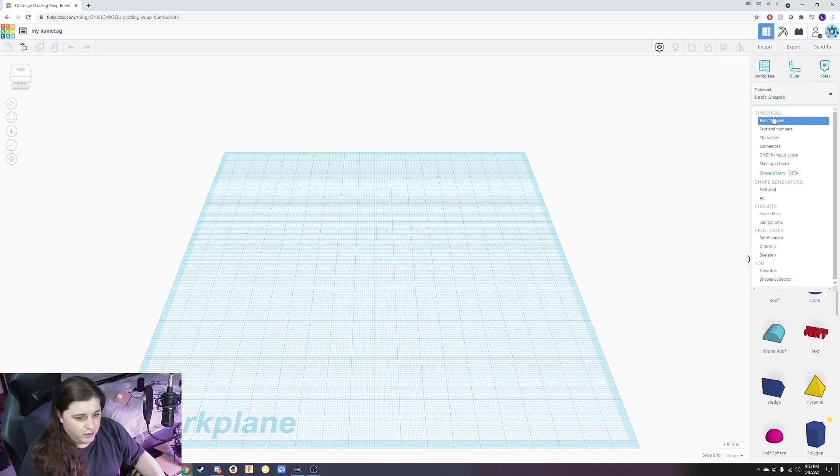Next, we want to get a shape onto the platform. So we're going to go down to basic, to the right side. It's already on basic shapes. If it isn't, left click on basic shapes and just go down to it and click on that, and you'll be brought up to it.

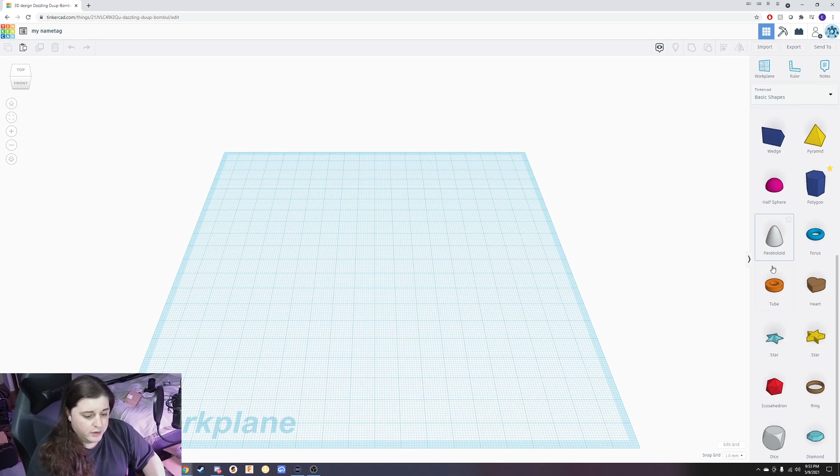Now we're going to make the basic shape of the name tag. We want to get kind of a square-like figure, but we don't want to use the box because of the pointed edges. So we're going to scroll down until we see the dice, left click and drag it out onto the work plane that they have here.

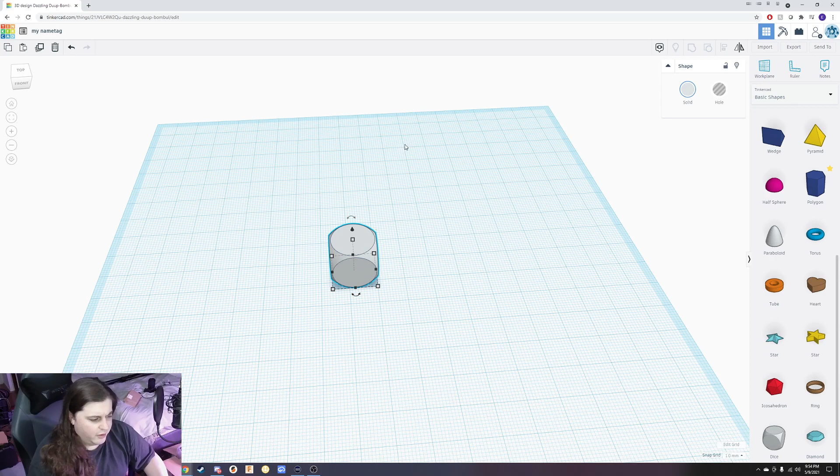Now the reason I chose this is because you can see all the sides are rounded. This means that it's not going to damage our clothes when we wear it. It's not going to poke you, not going to poke your shirt, not going to damage your shirt, hopefully. And everything's going to have a nice beveled edge around it.

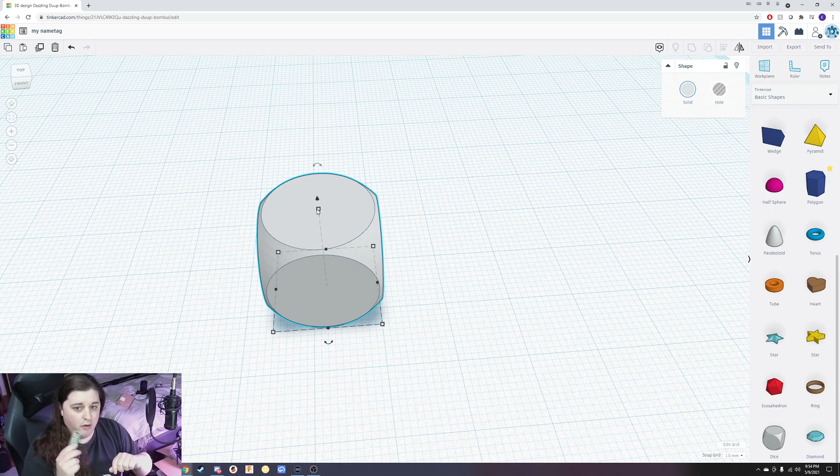Let me get out my calipers. And it's about 1.75, my original name tag. I kind of want to model the one I'm making now on screen off of my original name tag, so it's not too much difference. So, 1.75, but because 3D printing materials don't do well...

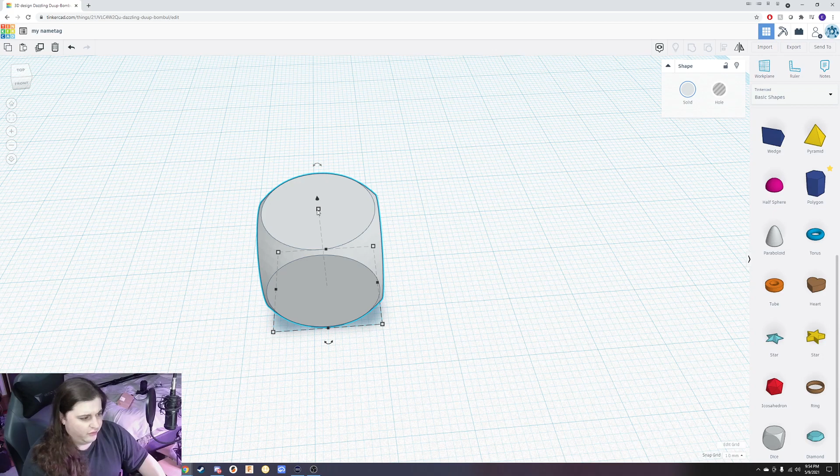It needs a certain thickness. It's not molded plastic, so I want to just make the height of this. We're gonna make this 6, actually. Now there's a point to that. 6 millimeters is a bit thick, but...

The reason I'm doing 6 is, first 3 millimeters for this plate, and then for the top plate, we're gonna add magnets on the back of ours because I like this one, it has a magnet design. This one's a steel plate, magnetic, not aluminum. Aluminum isn't magnetic, but steel plate on the back of this attracts the magnets, so you don't have to pin it to yourself. Pinning it ruins clothes, ruins everything.

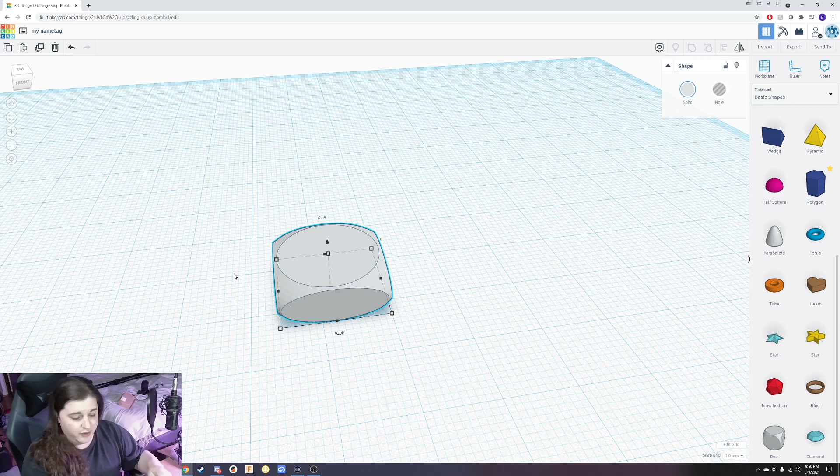So I want to keep my clothes from being damaged. So the first half of this is going to be 3 millimeters for the magnet, and then the other three is going to be for the design of the name tag.

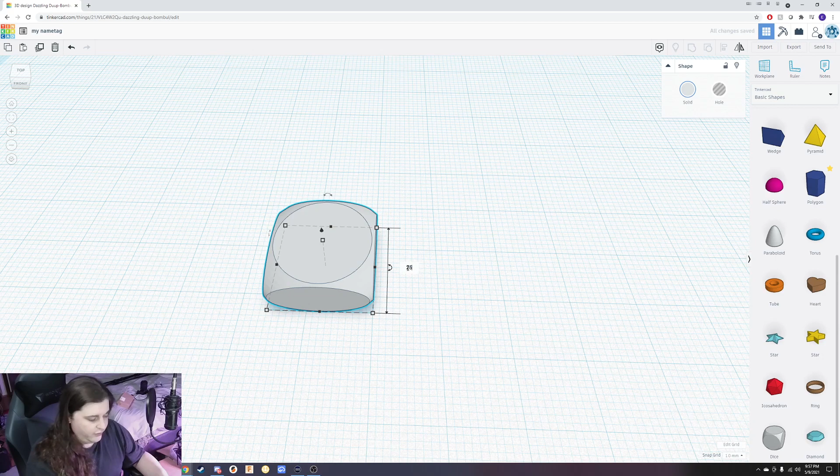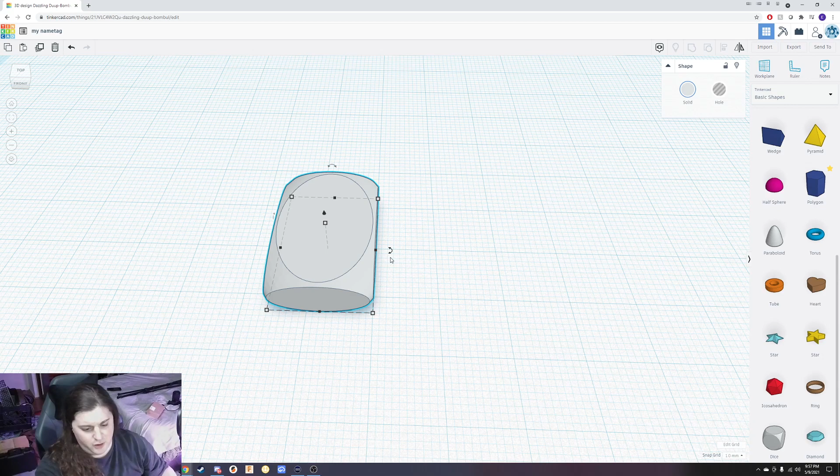All right, so now that we got 6 there, let's go for the X and Y axis. So one side of this is 25.5, okay, so that's the Y. 25.5. And then the X axis, the whole thing being measured out, like right there, that is 88.19. We're just gonna say it's 88.

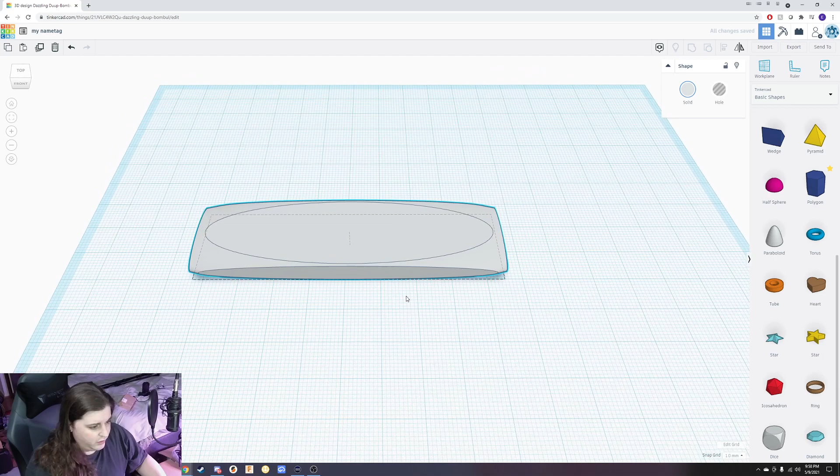All right, there we go, there's half of our project. Next, we're gonna grab some text. It's in the basic shapes, you just scroll up until you see text on there. Left click and drag it out onto the field. We're gonna put my name there.

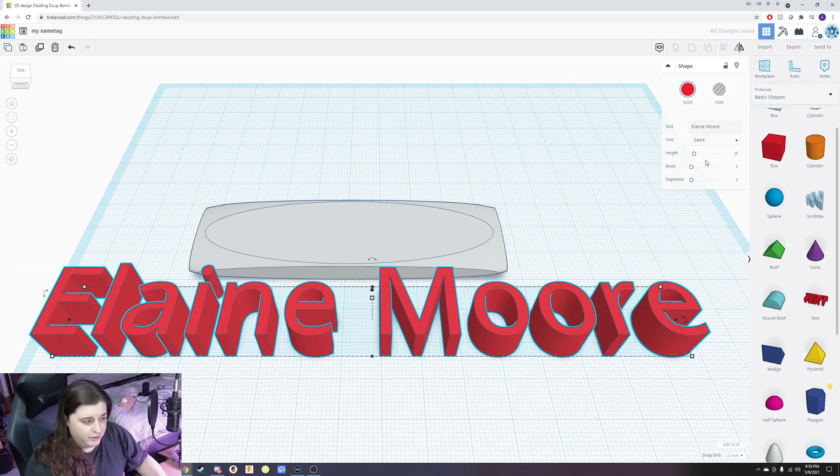And you know what, I'm also gonna change the font. So the font is, everything's being done on this right hand side under shape. You put the text you want, then you can go to the font right below it and change that. Let's go for Sans, I like Sans a little bit better than what it was.

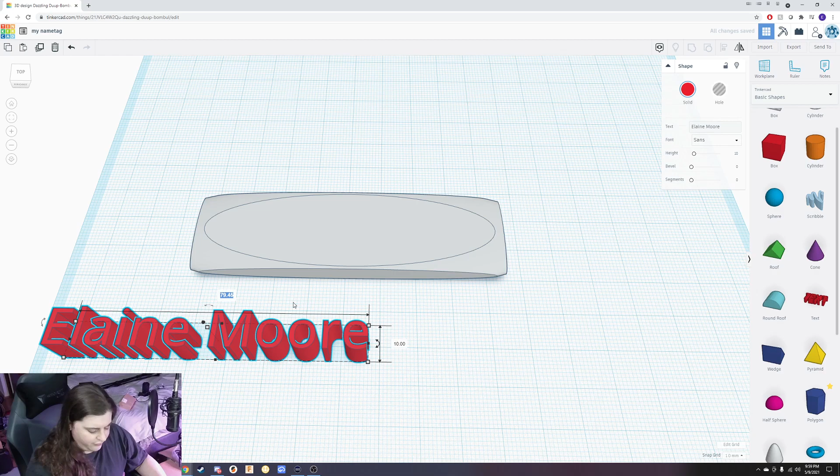And since it was 25, I want to make this a height of 10. And since it was 88, let's try for 70? I don't know, we're ballparking this right now.

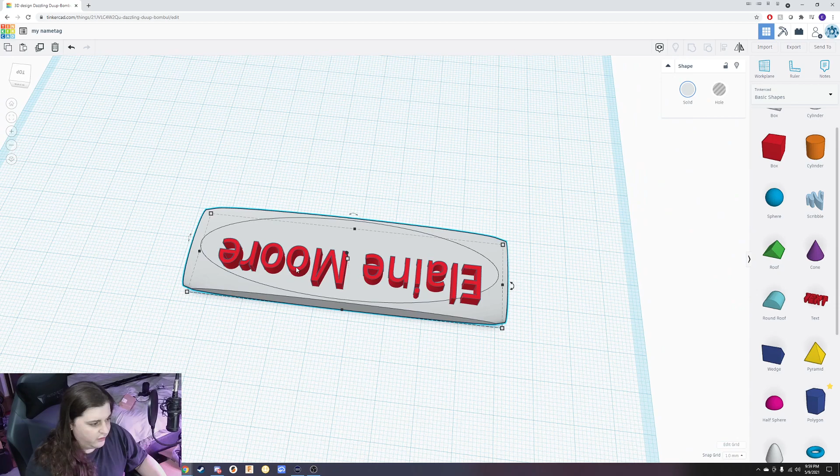I kind of want a spot where it's within the circle. I want everything to remain in the circle of the die up here. So let's bring this in a bit more. Left click, and I'm gonna select everything. Go up to align, and we're gonna just align it right in the center.

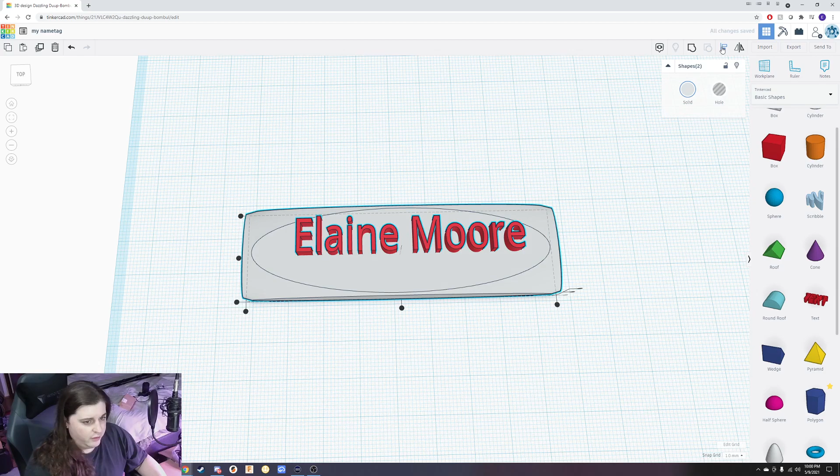Nope, needs a bit more shrinkage. Let's go for 62. Let's go try and align that again. And it's basically whatever you feel is right for you on this. You know what? I'm okay with this right there. Alright.

Next, I'm going to drag another text bar out. Left click, drag, and I'm going to put my title there. And we're also going to change that to Sans. And we're going to make this, again, 10. And we're going to make this 62 like the other one. Alright.

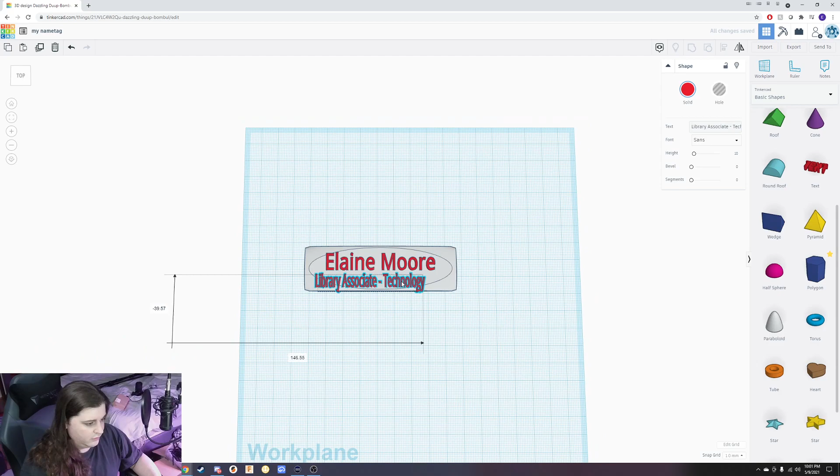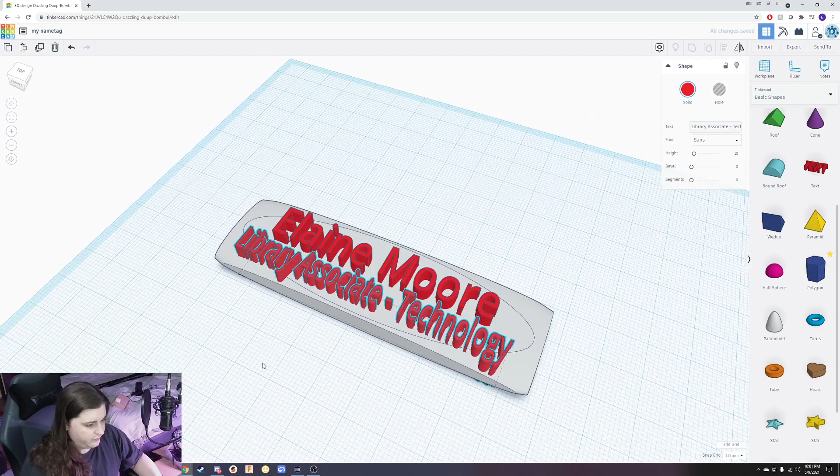And I don't care if this one overlaps a little bit. I actually kind of want to spread it out a bit more. Now, the problem with this is, actually, you know what? I do want to spread my name out more.

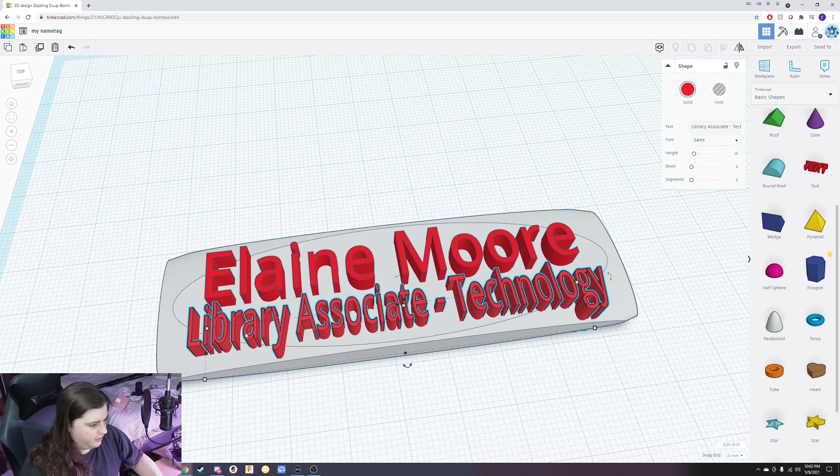I'm going to select all 3 of them and just align them to the center. And you know what? I want to make library associate technology, I want to make my position a bit bigger. We're gonna center that again. Everything's gonna be centered. All right.

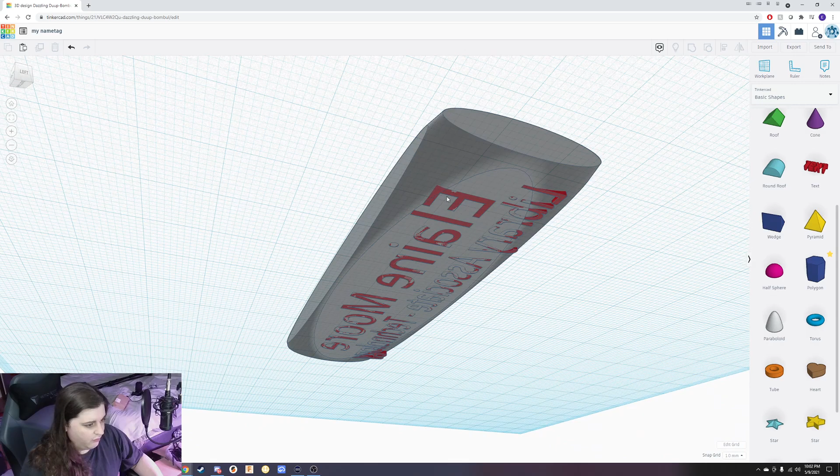Next, I gotta deal with overhang, because these are rounded. The words lie flat on the workspace right now, and the curved part going up doesn't. So you see all these, like, the letters getting right past them. Yeah, I don't want those there.

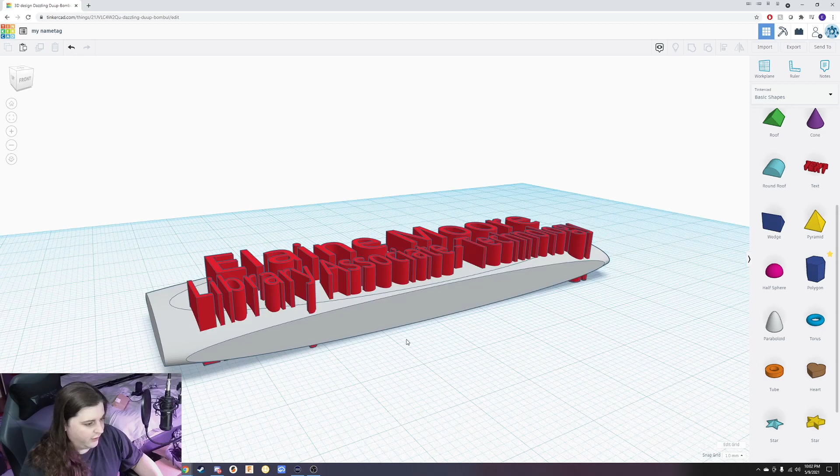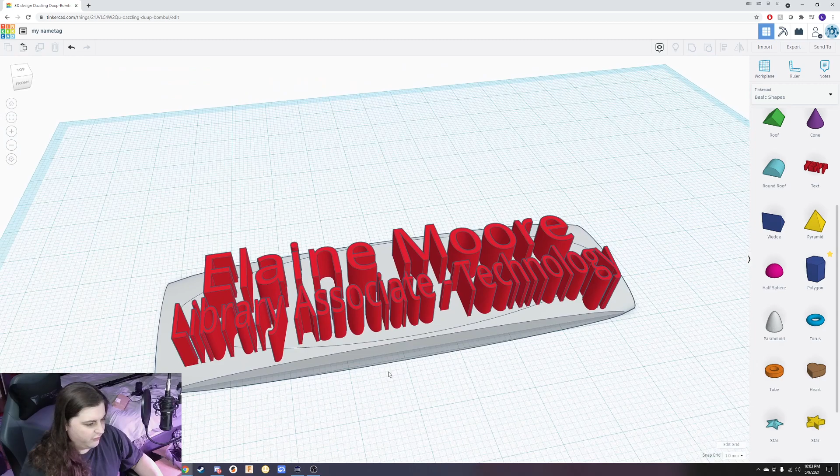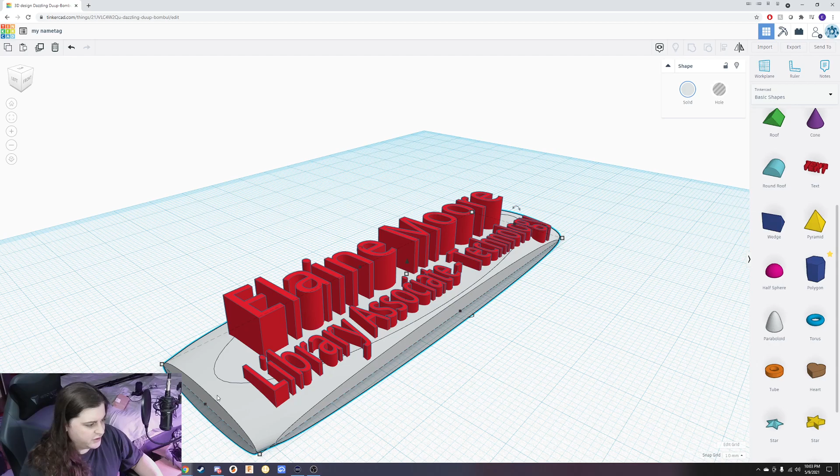Yep, okay, so yep. We want these at least maybe two off the plate, because this one—okay, so we moved the main piece halfway down, which is 3 millimeters. So we want to add an extra 2 to the words, so it's 5.

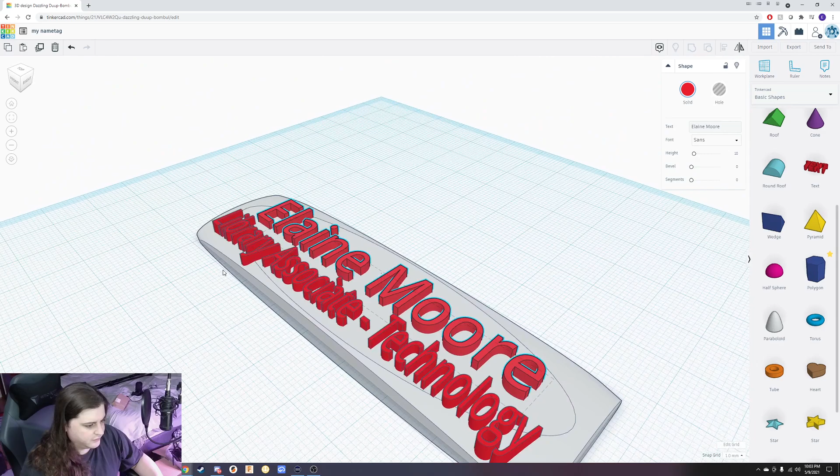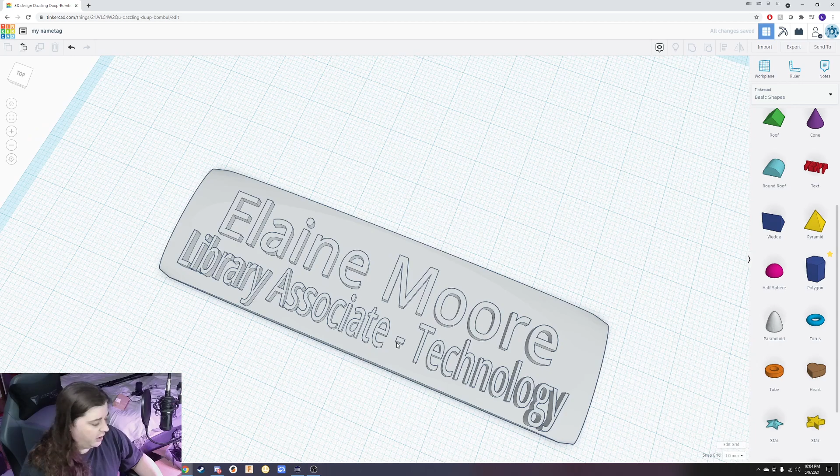I mean, it doesn't matter what you do with it. If you wanted to stick out a bit more, you can, that's fine. Heck, right now, if you wanted to, instead of combining them as is, you can do two options right now. You can either combine them as is, and it would be a stick out kind of name tag, so the letters would be pointing out of it.

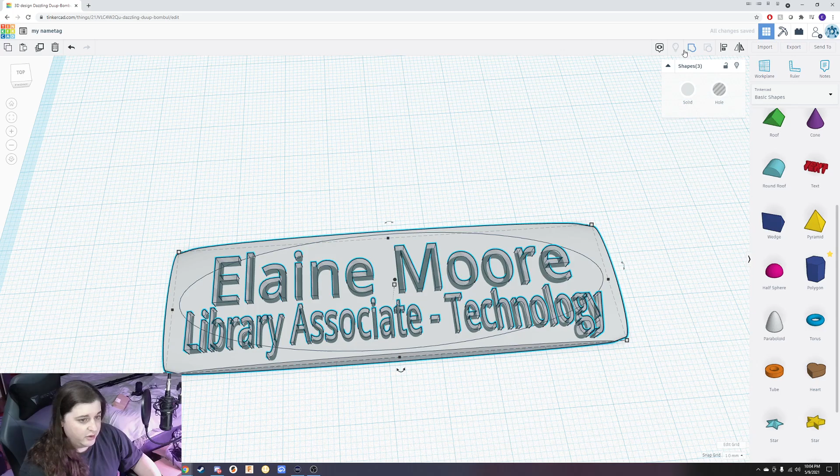Or if you wanted to at this time, you can turn the text. You would have to select both of them one at a time, and on the right hand side is where it says solid. You'd click hole instead, and then you do the same thing with technology. You'd click on that and press hole, and then you'd combine them, and this would cut into the name tag instead of having it on the outside.

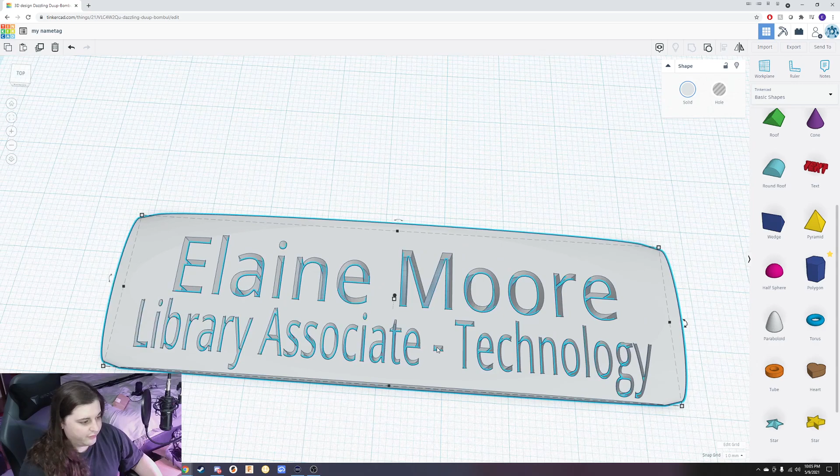So let's do this one this way, because I'm too lazy to actually change it back. But if you wanted to do it this way, you can also print it in 2 different colors.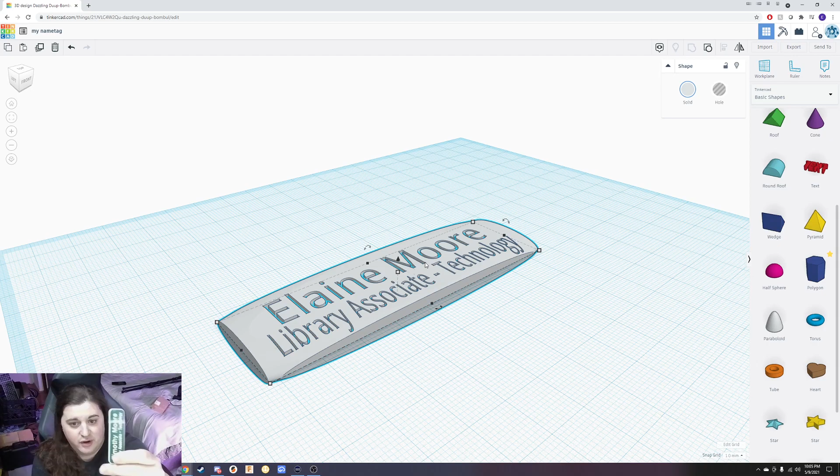So you'd have the layer, half of it you could print, the bottom half, in like white or something, and then you'd put a dark color for the top, so it would stick out like this name tag. It would kind of emulate this kind of texture. So it would do the white.

That's basically what they did here. They did it in white, had a white background, and then on top of that, they did a green. So that'd be fine.

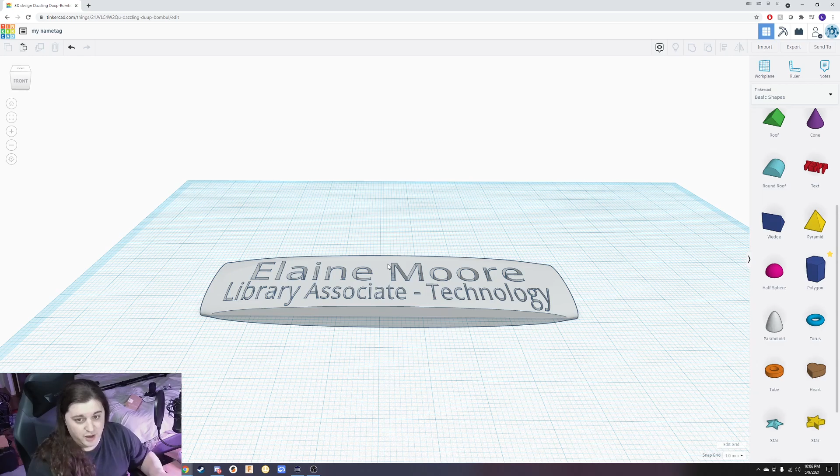This is actually the easiest way to get dual color, because if you did it with this stick up kind of thing and you wanted 2 colors for the name, if you wanted the name to be a different color, you'd have to catch it a lot closer to the end, and you might forget about it.

That's the thing when you change colors on your 3D printer, if you wanted to do 2 different things. So I'm gonna—oh wait, no, I'm not gonna do anything with that. Okay, so now that we got that, we have to deal with the back side.

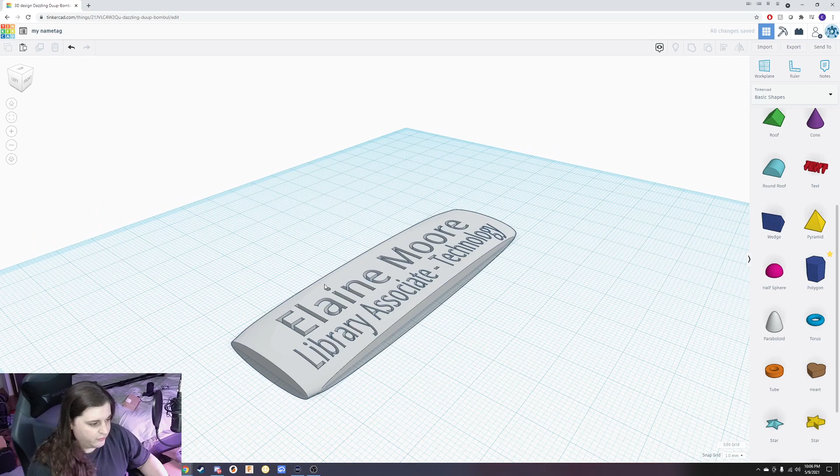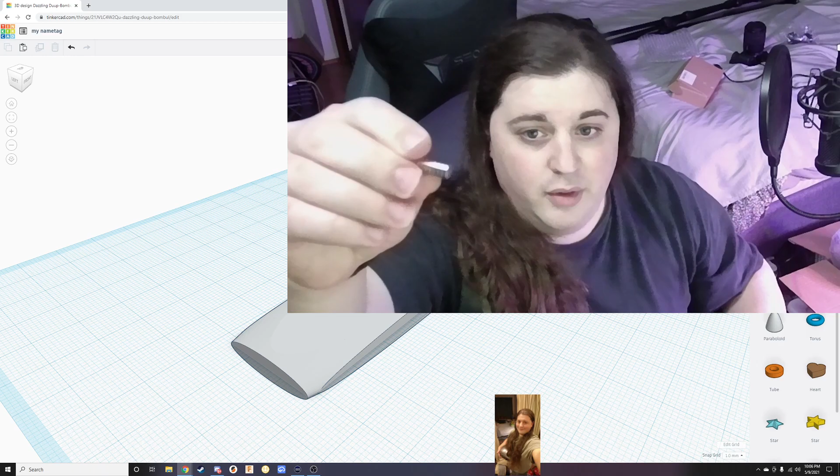Now I got these cool little magnets. Let's grab this. So I got these cool little magnets, Harbor Freight. They're the standard, like, miniaturized button size. They're 8 millimeters circle diameter.

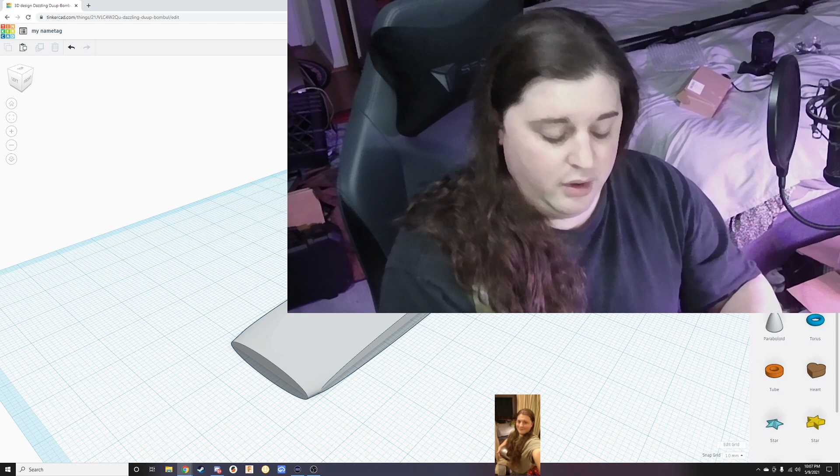And so, yeah, here's a stack of them. You get these really cheap, $2, $3, something like that. Actually, I didn't even think I paid—no, it's less than $3 for this. But, like I said before, this is what we're going to use to attach everything. So we need to drill in some holes to put the magnets into. Let's start with that.

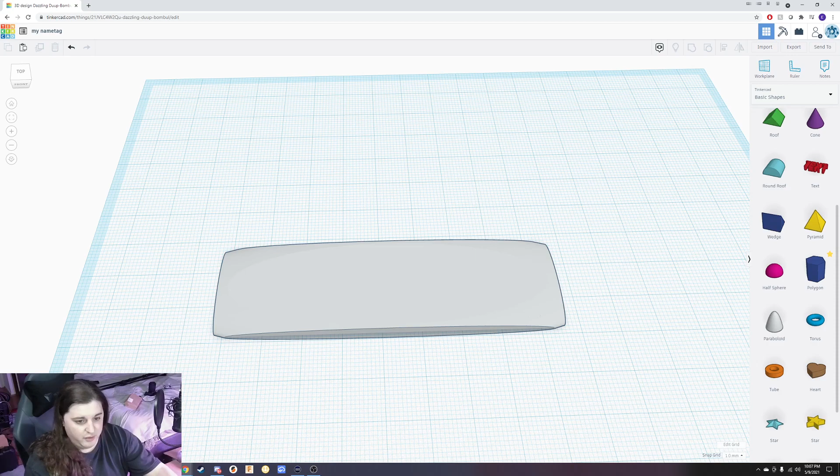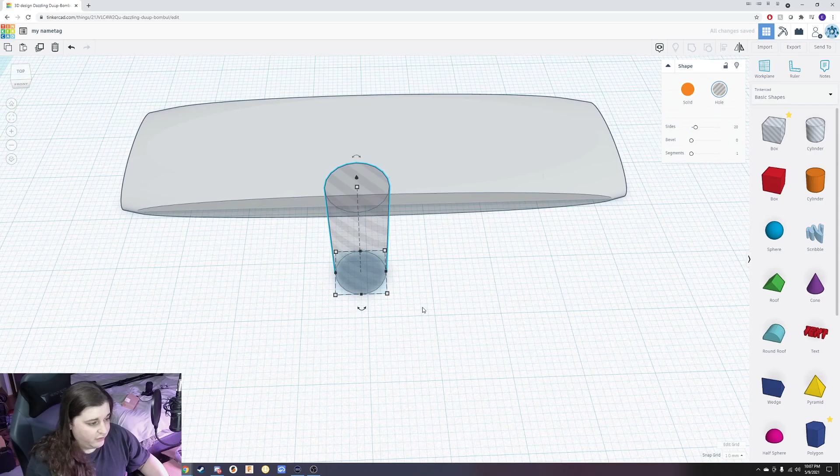So if I scroll all the way up, on the top right hand side is a cylinder. So we can grab that and pull it out. Now we want to change this to 8 and 8. So that way it's there. I already flipped around the name tag. You can do that by clicking on these half circles or semicircles with arrows on it.

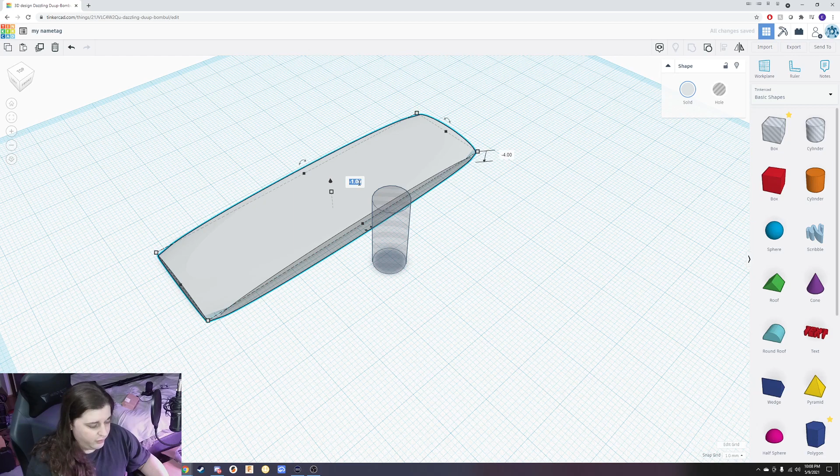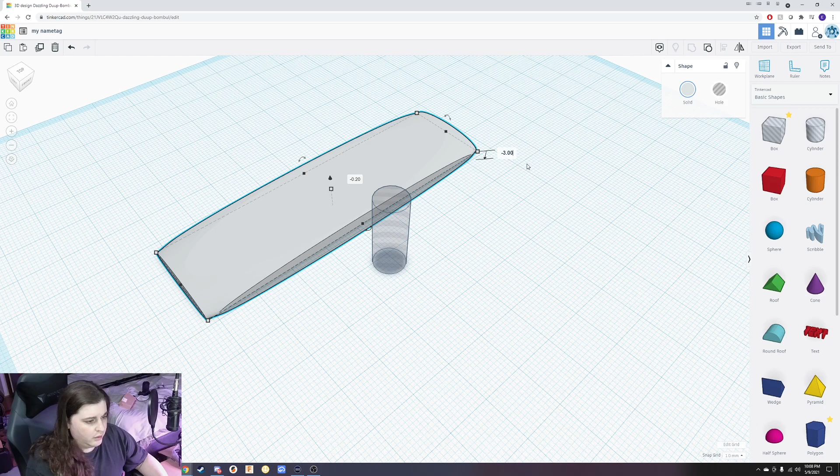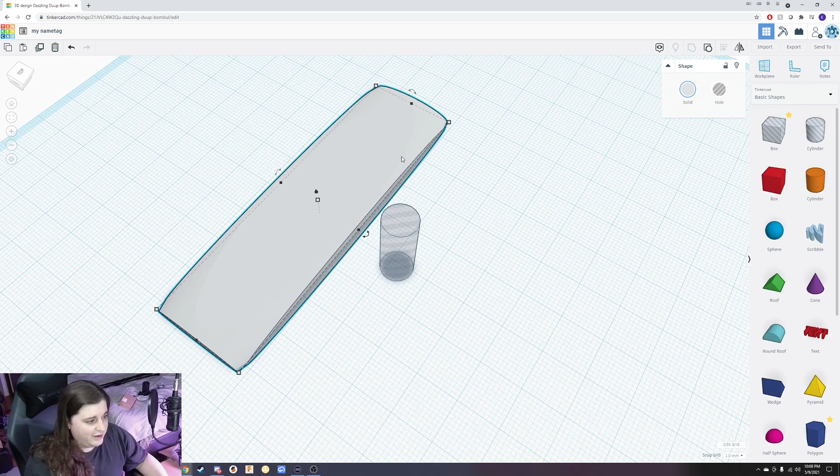I also want to move it down half a millimeter. Minus, wait, no. Nope. 3.5. Yep, okay, so I want to move this down in total 3.5 because I already cut the name in 3 millimeters into it. So I gotta do a little bit less so that way it doesn't interfere with the text on the other side.

So now that I got this one hole or cylinder, I want to talk about the sides. Right now, if you look at it from the top down, you can see this is not an actual cylinder, but a circle made of lines. It's not an actual circle. They do this because the calculations needed to do a perfect circle are basically impossible on this type of web-based software. It's too advanced, you're not going to get it.

The website will crash, but your printer is probably not that great at dealing with circles either, because all it is is motors moving in a linear X, Y, and Z axis for the most part. If you got something more advanced, great for you. But most printers out there only do lines basically. So all your circles are basically emulated with lines for 3D printing.

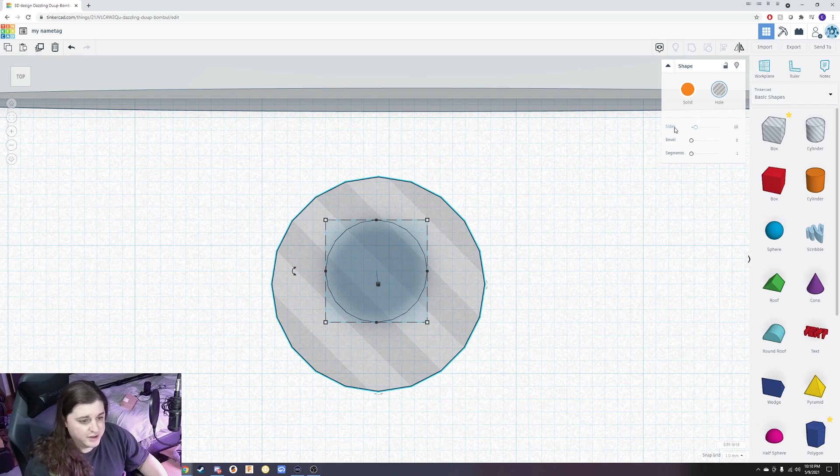So in order to make this a little bit smoother and add more lines, on the top right, once the cylinder is selected, you see the sides button. We can go down all the way, and there's 12 sides to this cylinder, or we can pull it all the way up, and it almost looks like a perfect circle, but there's 64 sides to it.

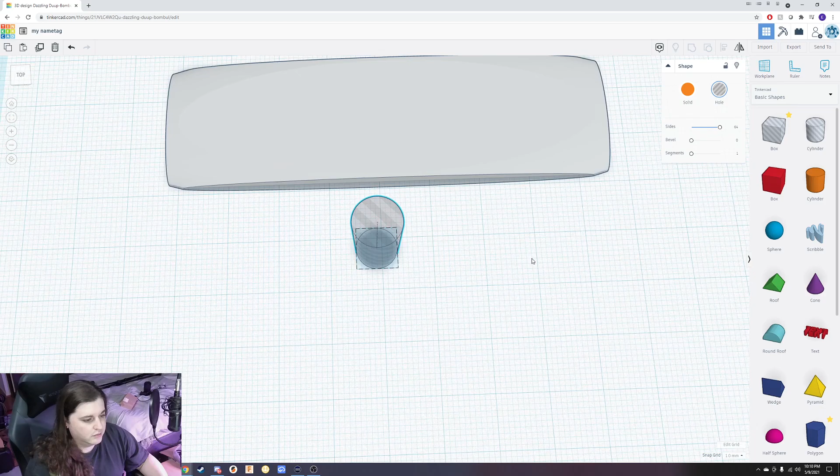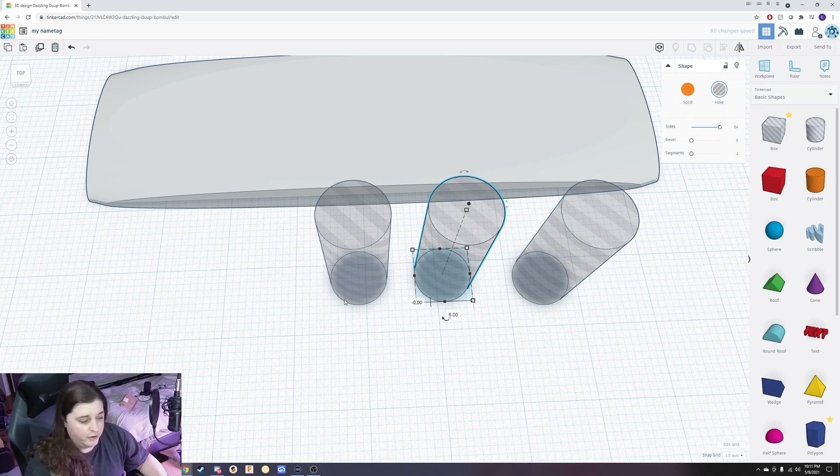Once we got that, we can copy this because I want to have 3 magnets on it to hold it. So select the cylinder, copy, and paste this twice. There we go. Now we want to align them the same on both sides. To do this, we select 2 of them, hit align, and make them the same. Then we grab one of them and move it to the left, minus 25. All right, that's great.

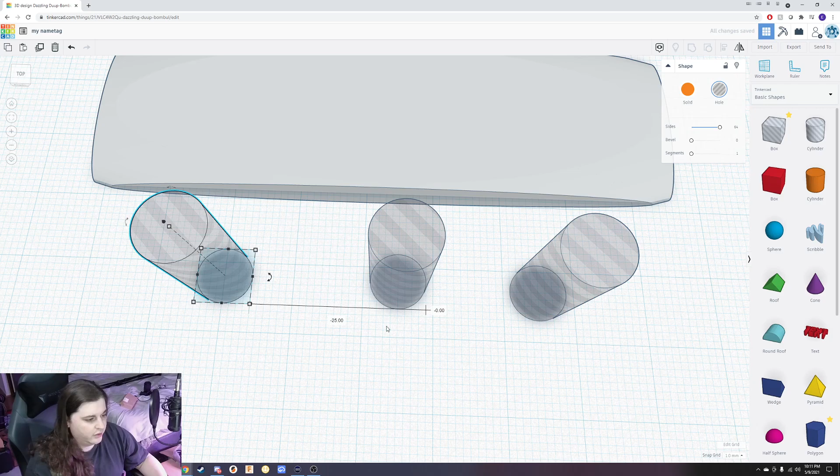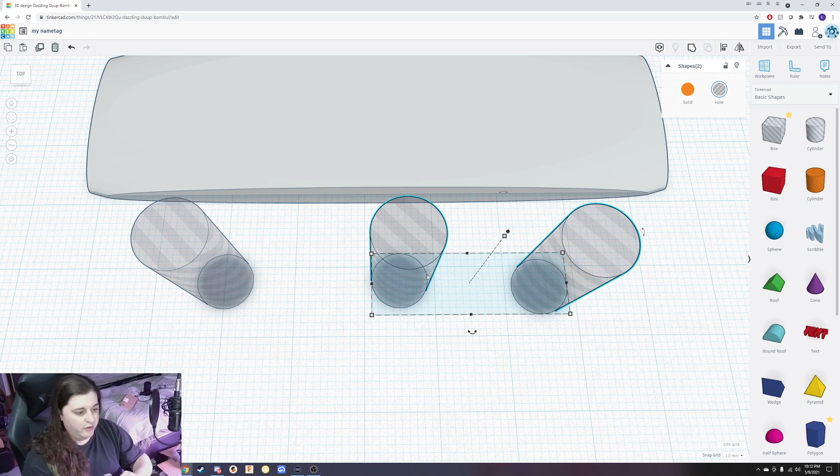Next, we're going to do the other side. I select the one we want to do, and also left click and drag to select the middle one. Now, when you align something, both objects move toward each other equal distance. So if I hit align, they're going to move to where that shadow is. But I don't want the middle one to move at all because it's already aligned perfectly with the cylinder on the left, 25 millimeters that way.

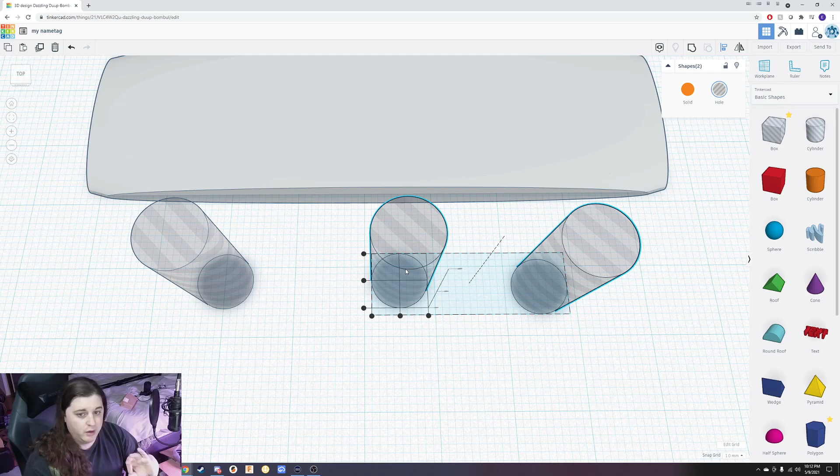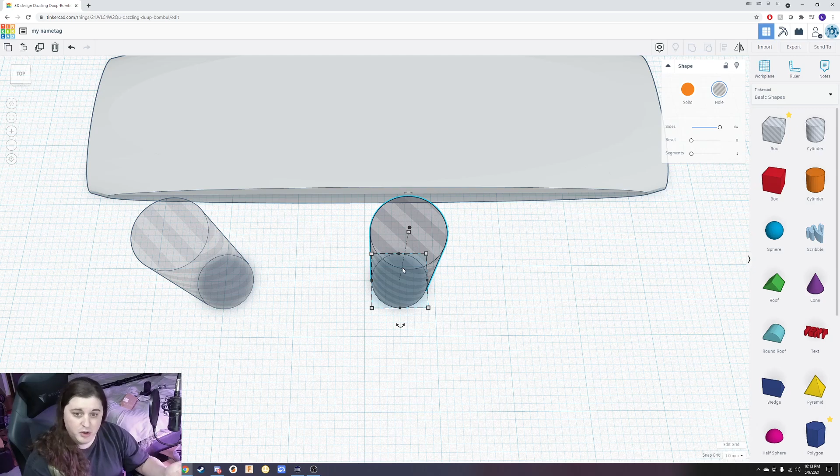So what I want to do is click on the cylinder right here, and that will align this cylinder over to this one. You can select a fixed point or a fixed object, and everything moves to that one. So we hit the center, and center it on the X and Y axis. Click off. They're now both in the same spot. Click on one of them, don't care which one, and move it 25 the other way.

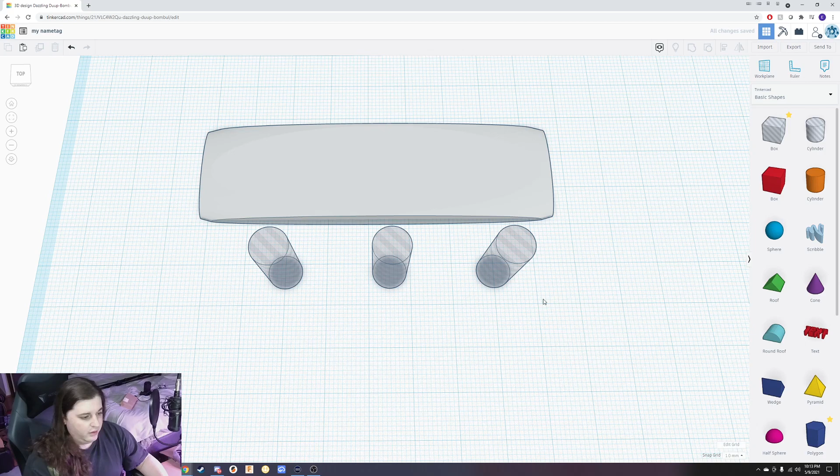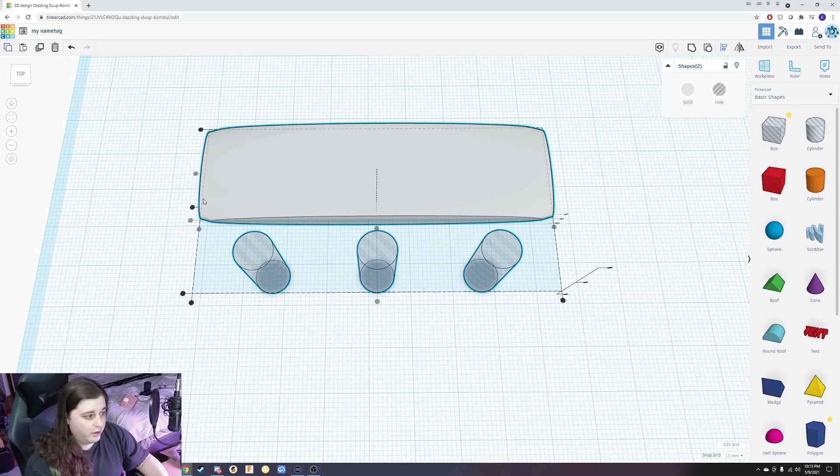All right. Next, we want to group these guys up. There we go. So that's one group now. The reason we did that is when we move it onto the name tag, we want it all in one, so it'll center everything perfectly. So I click and drag to select them both, align them there and there, and that's good enough.

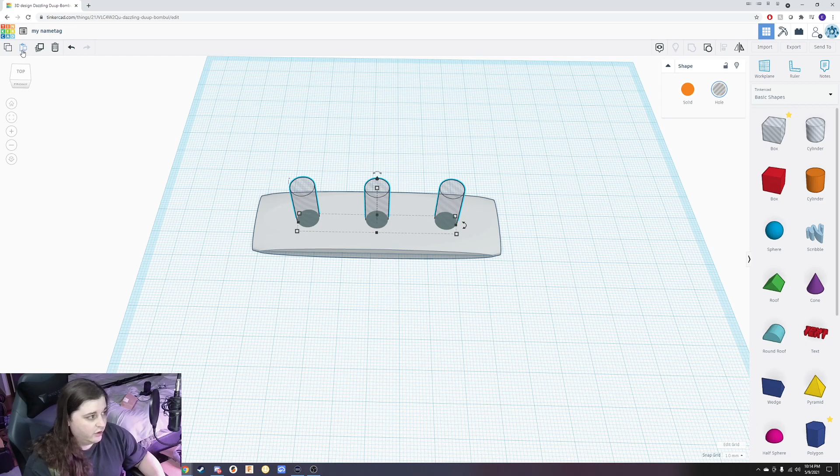Before we group them up, I want to copy this, because we're gonna make the back plate as well, and we're gonna use the same template. So I'm gonna go to the left side, copy, paste, and it pastes that whole group, not just the one shape. So let's grab that. Let's group them together. There we go. Let's raise this up. And as you can see right there, the holes are in. We're good.

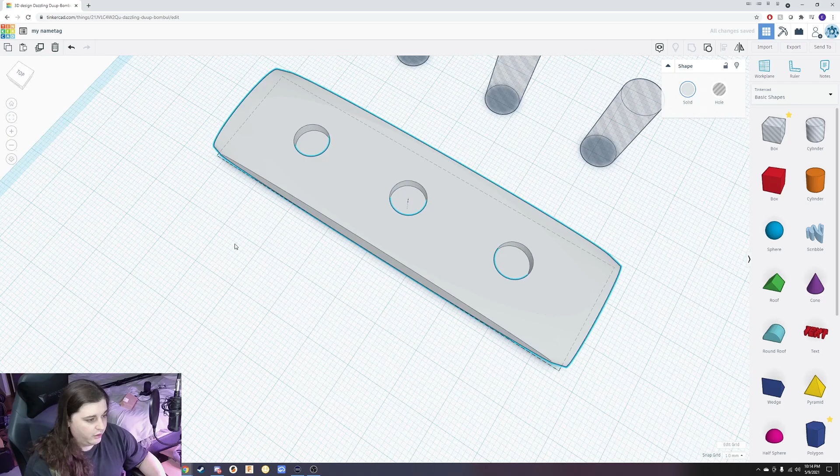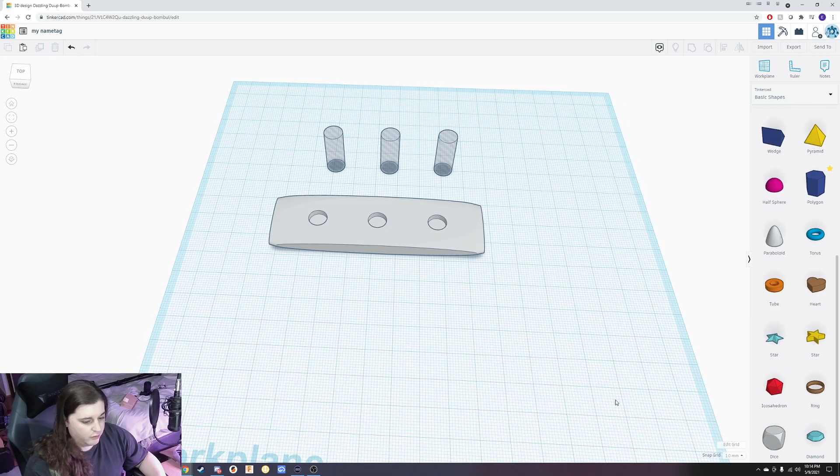All right. I'm going to rotate it back around. Oh, no, wait. Actually, no, we're not going to rotate it back around, because when I do the back plate, I want to check it off. So, for the back plate, we're going to grab the same, the dice. And we're going to kind of eyeball it here. We're probably going to go for 6. We're going to go for 5, actually. 5 with the length.

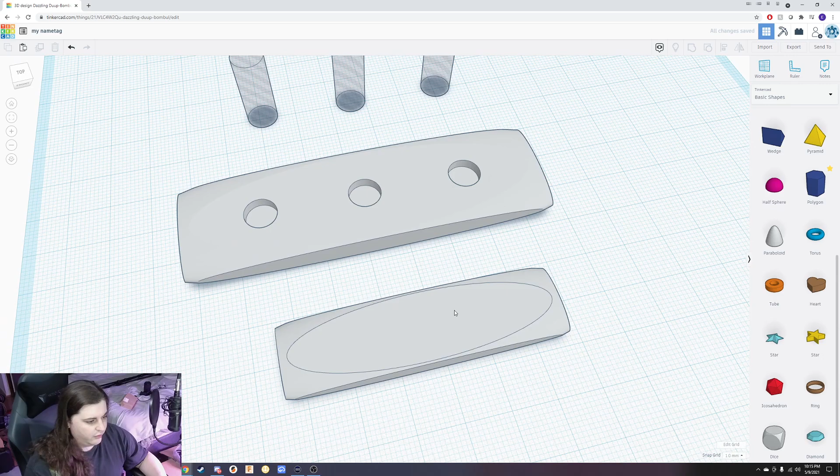No! Okay, so my mouse has kind of a thing where if you click on the center button in any way, shape, or form, left or right, it just freaks out. So I just want to make it so...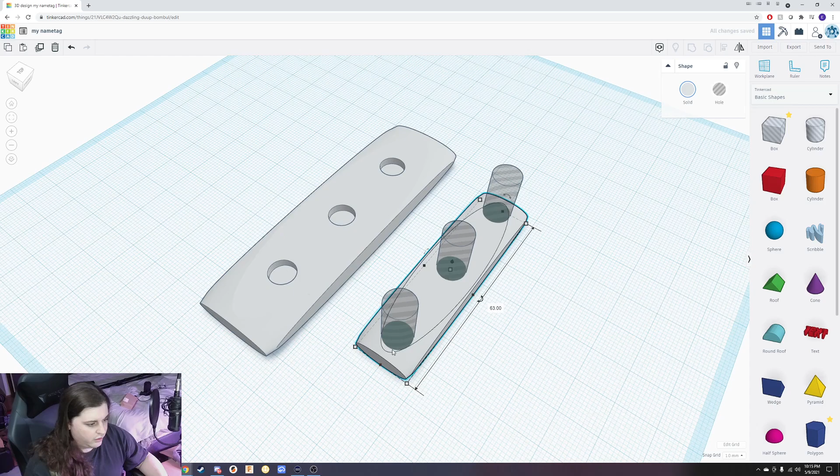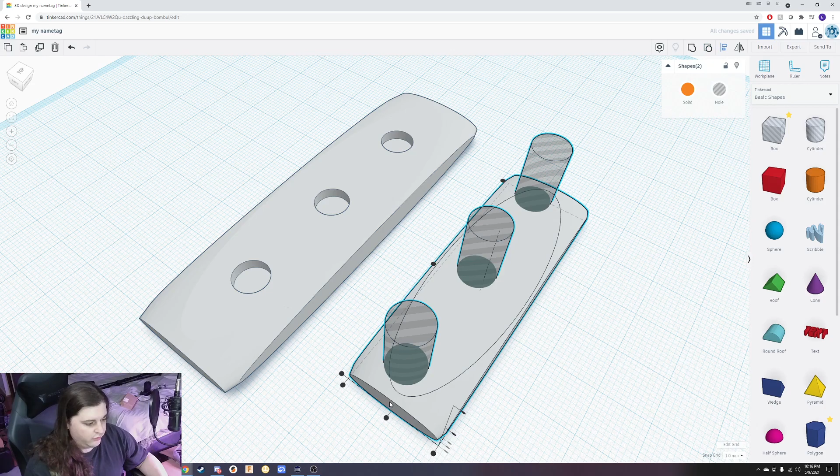Okay, so I'm grabbing the 3 cutouts. We're going to align the back plate to this. So I just want them so that way they are... you know what? What did I put the other one at? 25 or something? 25, 50. Okay, so we're gonna make this 20. And we're gonna align this. And you know what? We'll make it shorter. No, we won't. Actually, yeah, we will. And I'm gonna align it again.

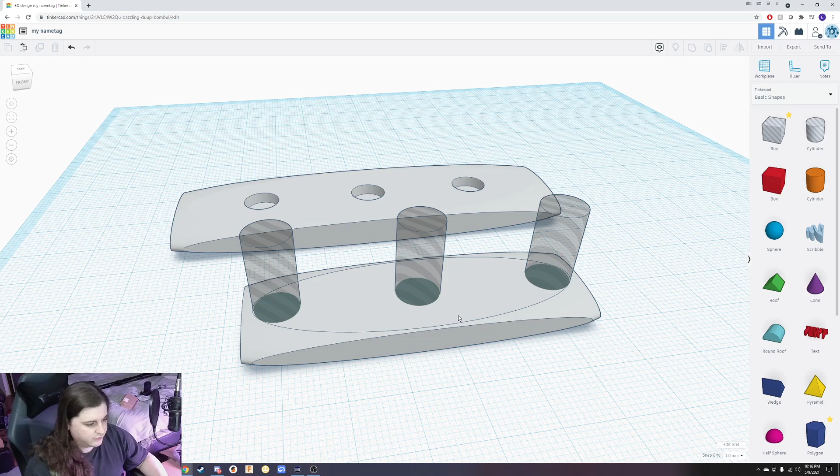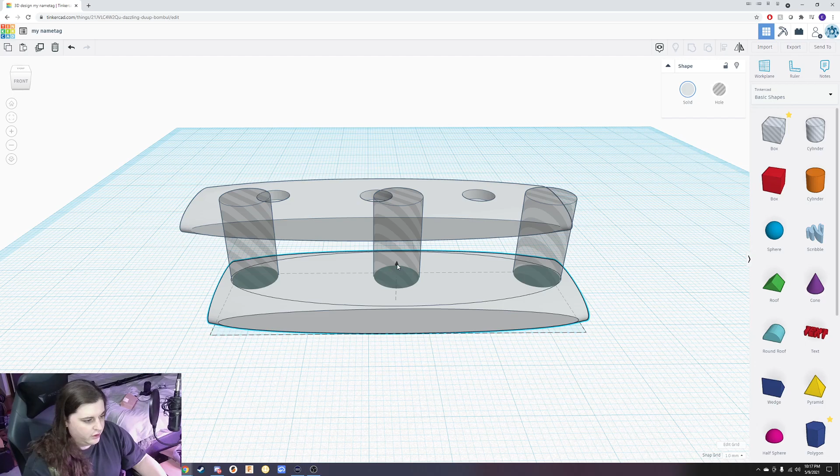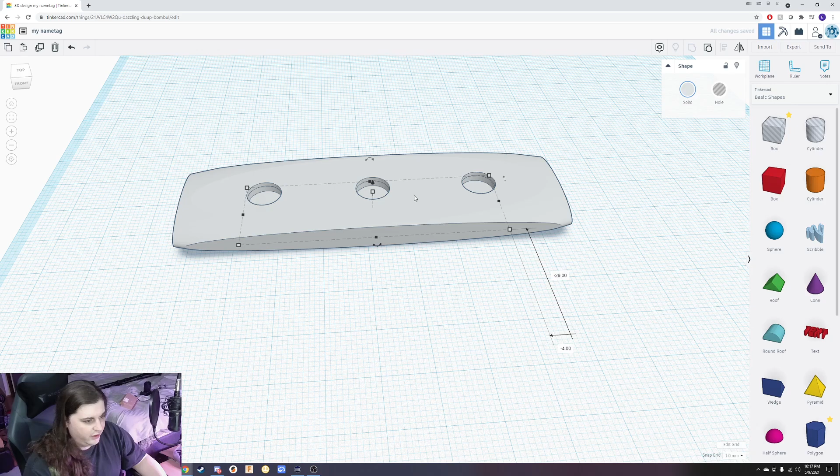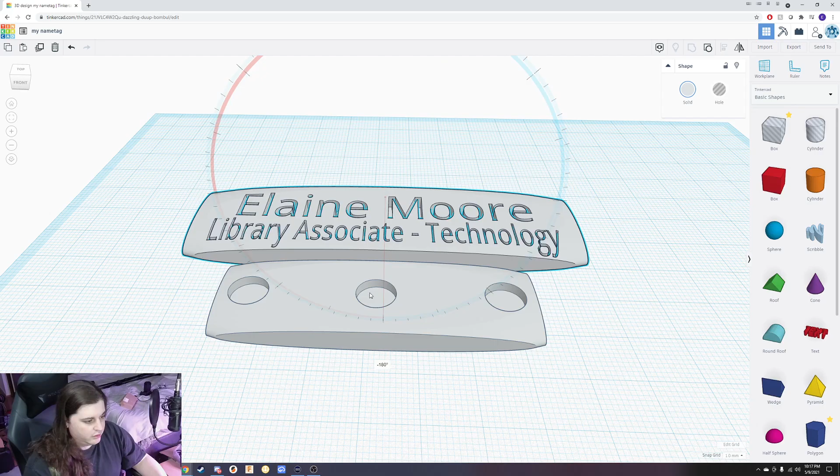Alright. So now that we got both of these things together, I'm going to place them in a way where it'll print out the best. So if you were to do these, I would recommend having a separate Tinkercad file for the backplate, because it'll print out both of these shapes in one STL file. You can't separate these once you export them like this. There's no way to change it. When you export it, it's all going to be...

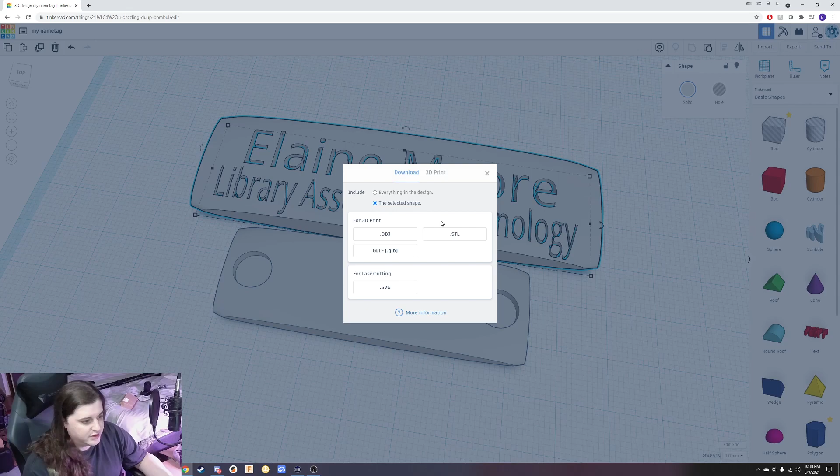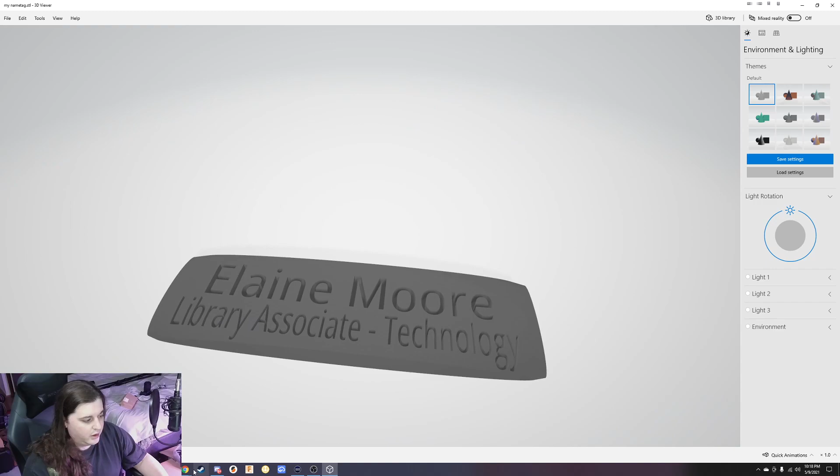Oh, wait, yes you can. You'd have to select each one of these and you can... Cool. I actually like this. This is a new feature that I've learned about right now. Pretty cool. So you can just choose the selected shape, STL. So I've selected the name tag, not the base plate. This is in 3D Viewer from Windows, and it looks like it's just that. So, okay. I actually don't mind doing it all in one, because you can actually separate them. Before, you could only print out one STL file. So it's a new feature from Tinkercad I didn't know about.

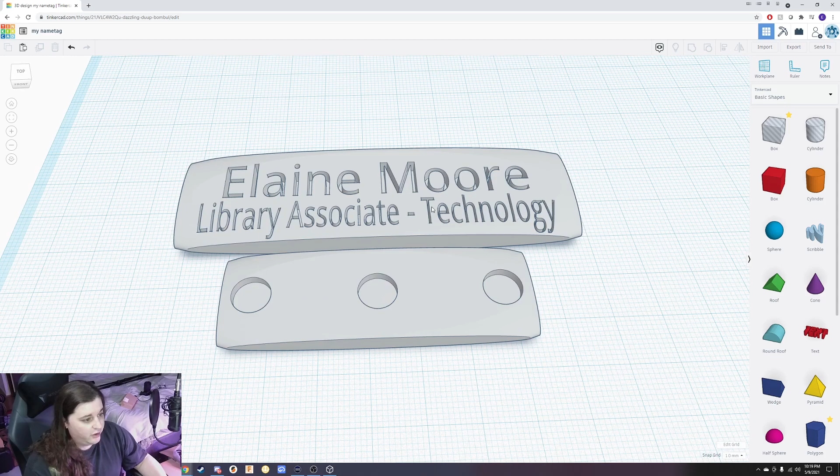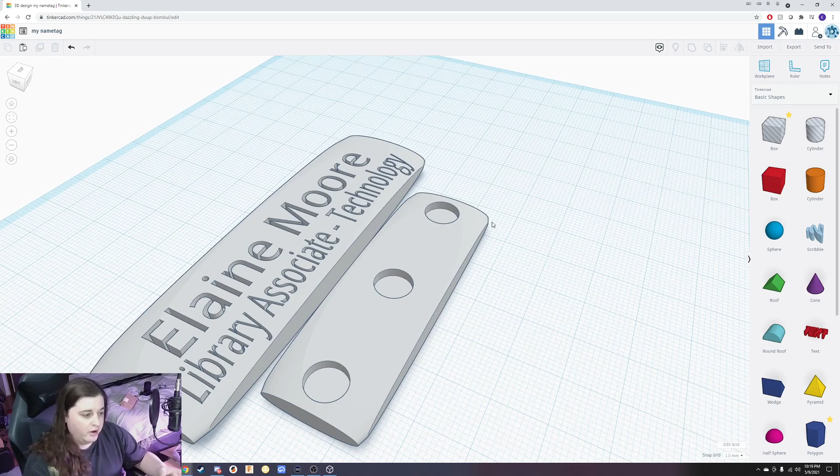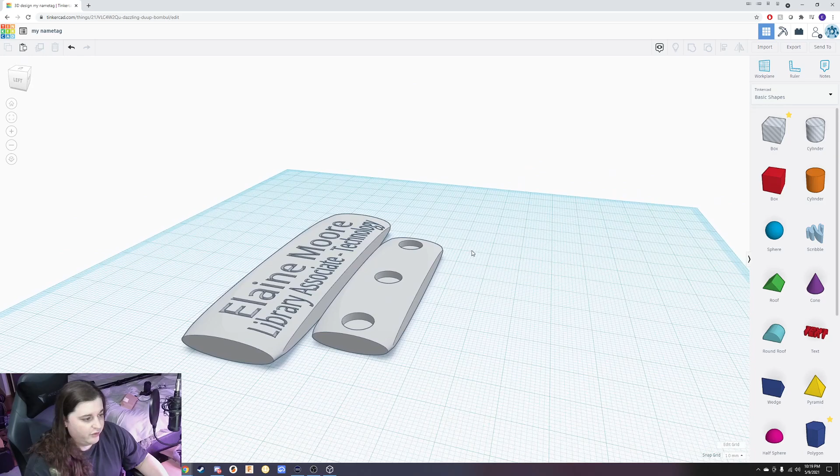So I would recommend, if you're going to be printing these, print them out one at a time, so that way you can swap out halfway and make the bottom half a different color. So again, you can have a dark color on top and the letters will be white, so it'll pop. This type of thing is great if you're a startup company and you can't spend money on name tags and all this other stuff, and it's just something that makes you look a little bit more official, even if you don't have the money to actually do it.

So, alright. Is there anything else I want to say? No. That's about it. We did this project really fast.